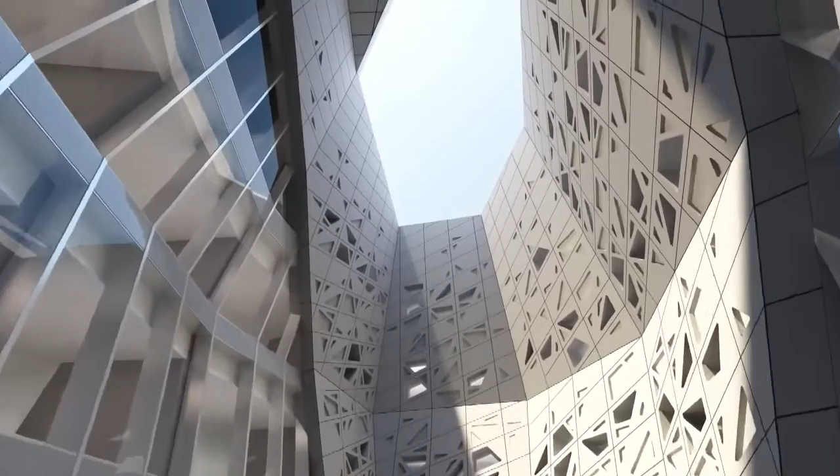Zaha Hadid Architects has never been afraid of taking calculated risks. When we design, we love working for clients who are incredibly ambitious because it pushes us beyond our ordinary boundaries. The office's aspiration of creating an architecture of movement and fluidity pervades the projects throughout. Anything is possible.

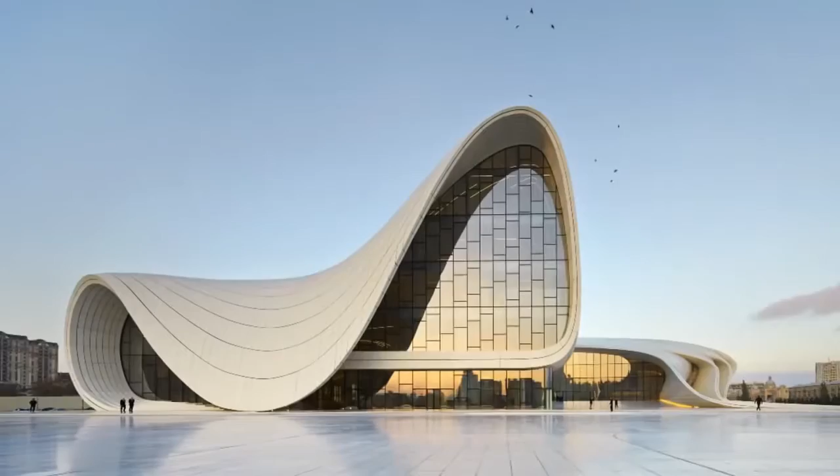The culture of Zaha Hadid Architects is a very open network of young professionals, very ambitious, very self-driven. Our office has many applicants from everywhere. They come from all over the world, and it makes a very nice atmosphere because people feel that everybody can bring something to the table.

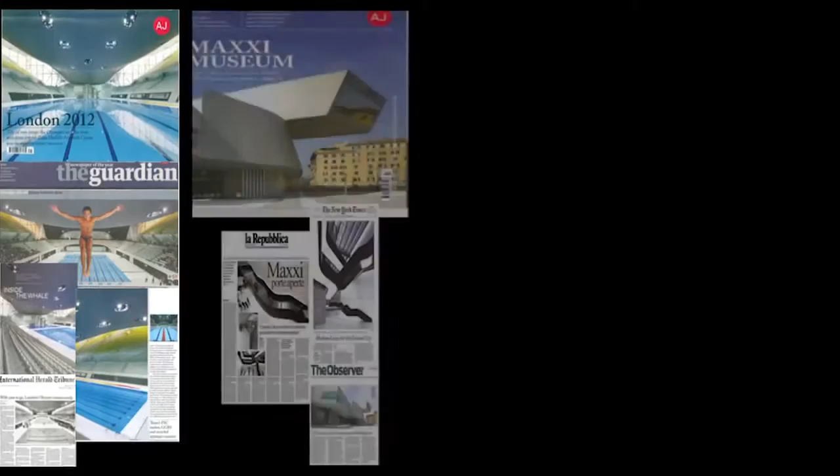We are a global design brand of 450 people operating across all continents. We had always known that the direction we are taking is the future of architecture, and that has been borne out now with respect to the great resonance and great success we've been able to achieve while we're still at the peak of our powers.

The design philosophy is geared to our time, to a new time of dynamism, complexity, to contemporary network society. We're operating on urban scale, architectural scale, but also we go into the interior scale, even all the way down to furniture and products. Our vision of the built environment is that it should have the same coherence and intricacy as nature.

We're an office that's obsessed with innovation. If we did it last year, we don't want to just be doing it again this year. A discipline like architecture is a theory-led discipline. As a teacher, you can only open the door a bit for someone to see what could happen beyond ideas.

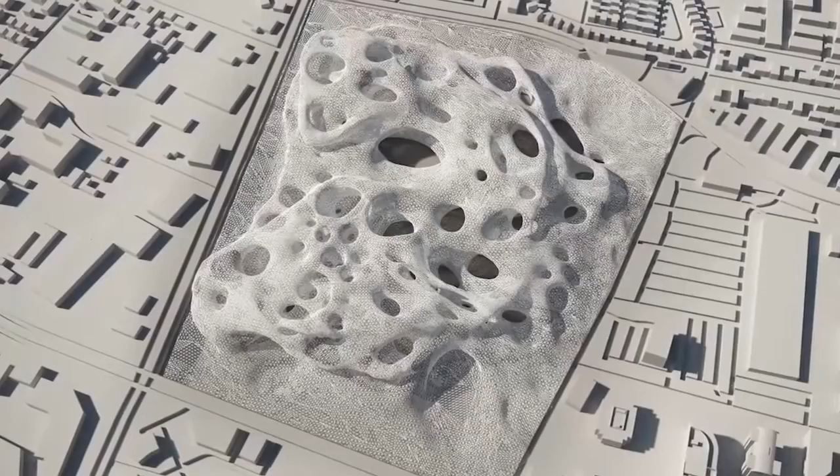We need to have the capacity to scan the scientific literature and then build algorithms and tools which we then distribute to the office. What is also interesting is how to do programmatic invention, because I think that is what is most exciting. We also have an in-house research group, CODE, the Computational Design Group.

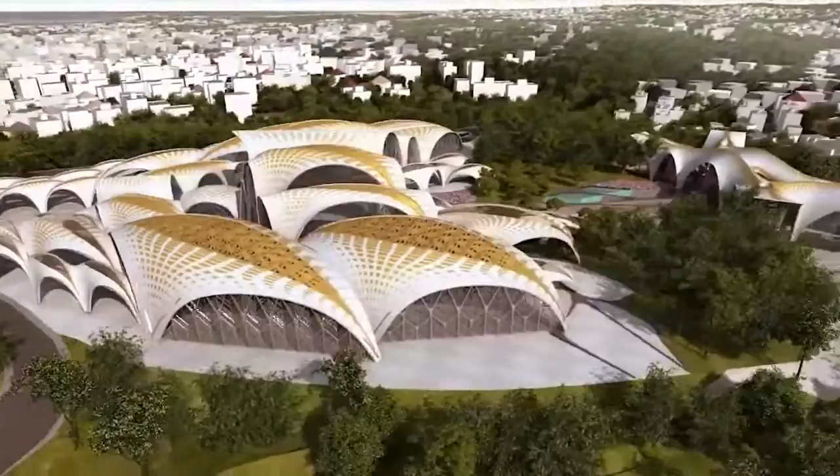The brief was to be able to not be a specialist group, but be a design research group. CODE is important in the range of things that it tries to do, between finding ways of generating shape and form and predicting its performance.

With computers, we were able to predict shapes without actually having to make physical models, cutting down a lot of trial and error time. The Venice Biennale is a very important architectural event where a lot of architects come together to discuss or exhibit their own work.

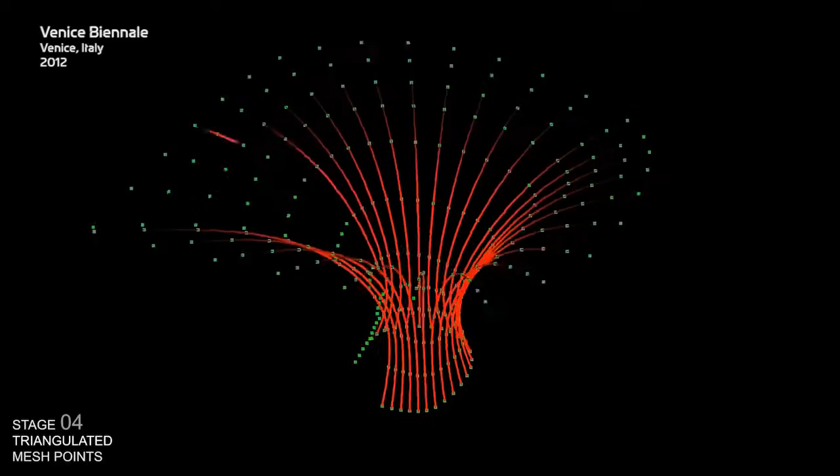So we were looking at paper as a way of finding or making things out of sheet material. Essentially, all designers are in a way hackers - they try and use their intuition to put things together.

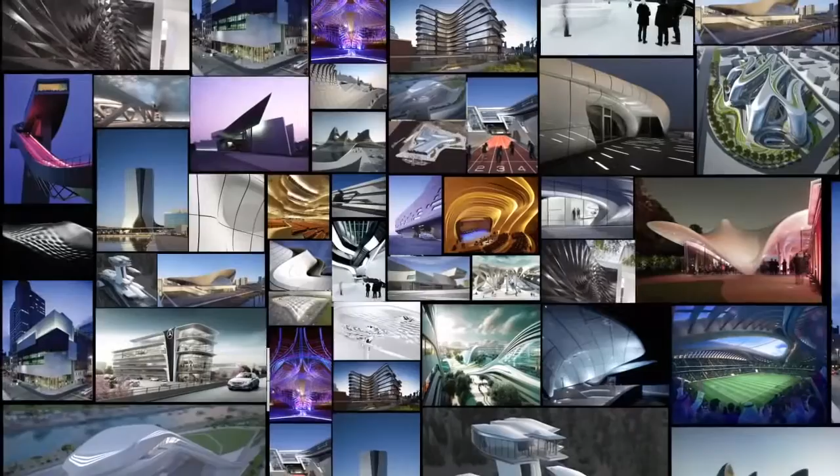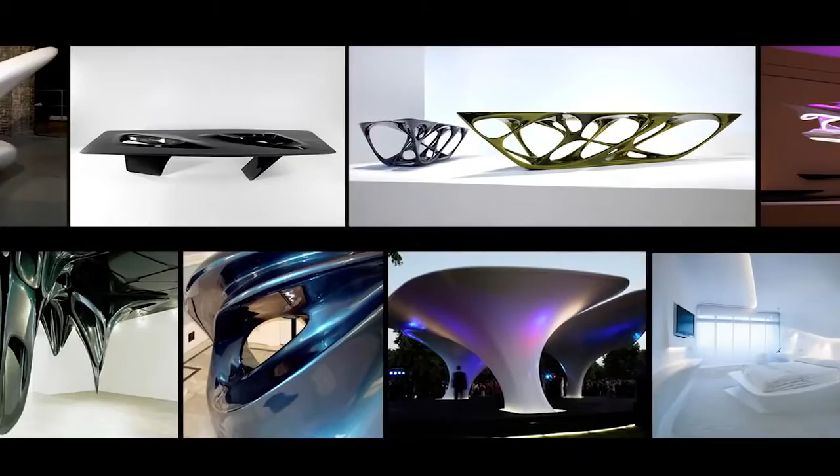The built environment we live and move through is a totality. The space, the artifacts, the products, even the fashion, the way we appear on the scene, is all part of a new world, a new way of life, and we want to have our finger in all of these aspects, which together create the phenomenal world we live and breathe.

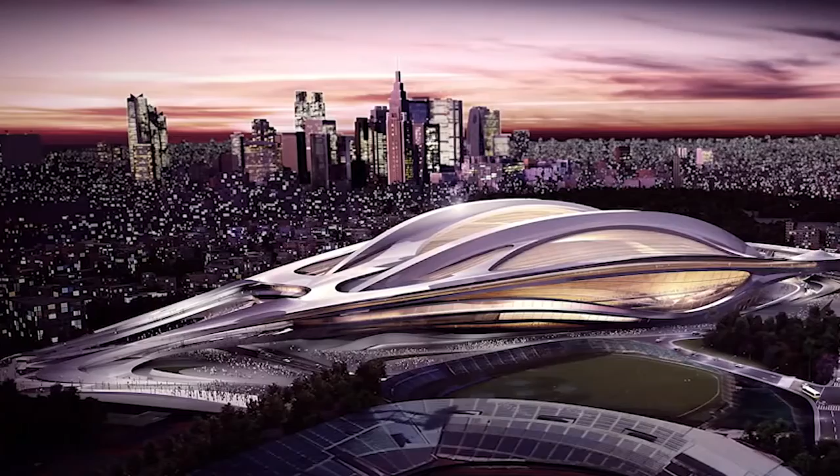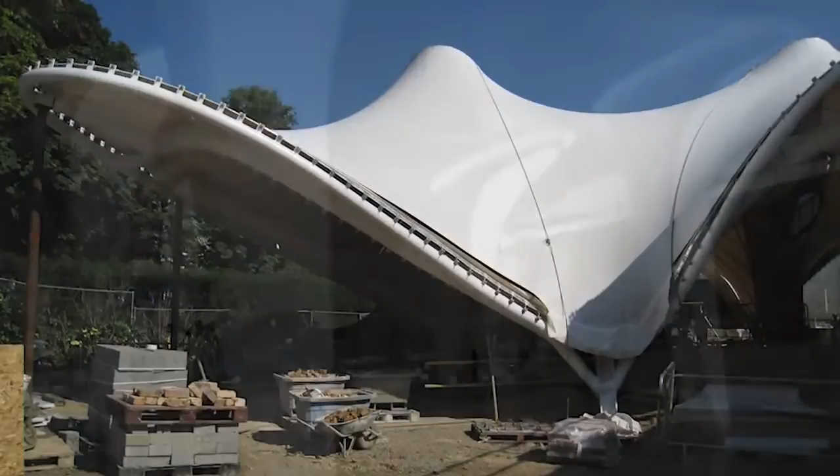Zaha Hadid Architects have invested a lot in cutting-edge technology, digital modeling, and file-to-factory fabrication processes. In every project that we do, we try and push the boundaries of what we can do, how quickly we can do it, and we see the technology as a means of achieving that.

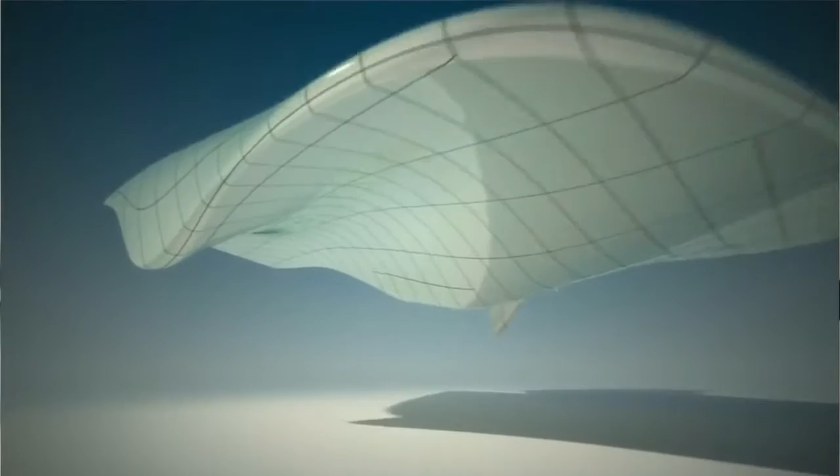We're entering a kind of material innovation, how you use materiality in a very different and innovative way - using innovative materials like glass, for instance, where glass has been thermoformed according to molds which have been delivered by the digital model.

Innsbruck Stations is an interesting example here. So here we have a thermoformed glass which generates a fluid body.

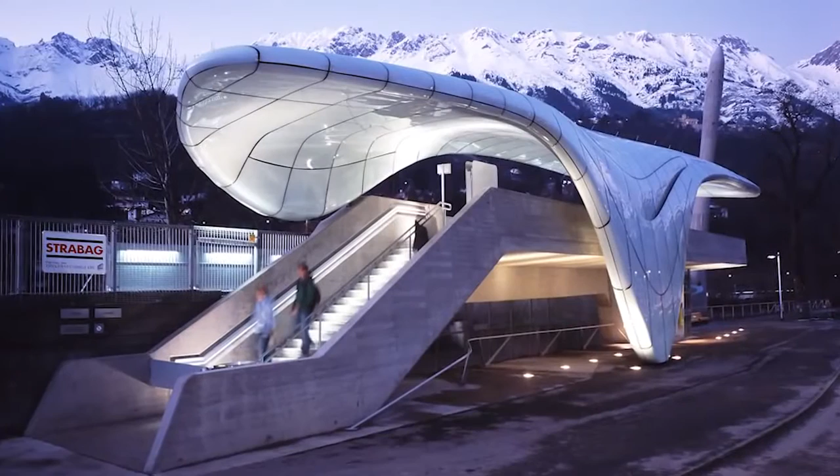Another interesting project to mention is our collaboration with Chanel for the Chanel Mobile Art Pavilion. The unusual thing here is that it's a lightweight modular structure which has been built and rebuilt in different locations, and can be quickly reassembled, demounted and reassembled again.

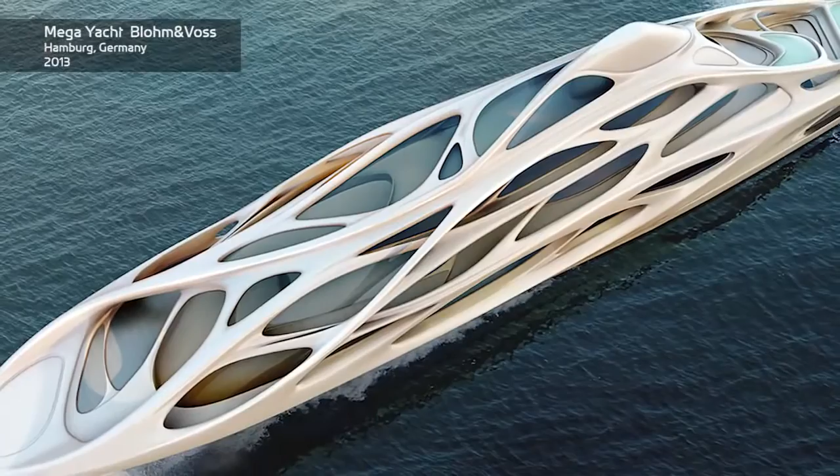One of the most fascinating projects we're currently engaged with is that mega yacht with Blohm & Voss. It's the height of elegance and lifestyle. So that kind of yacht is a fully designed universe, a compact microcosm.

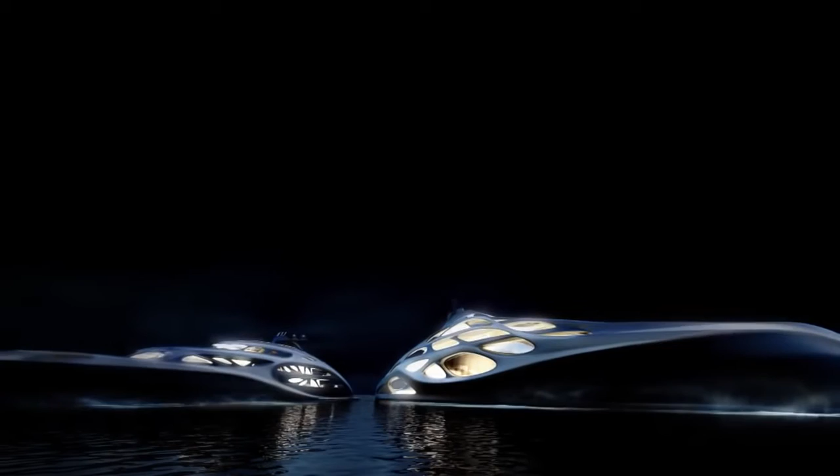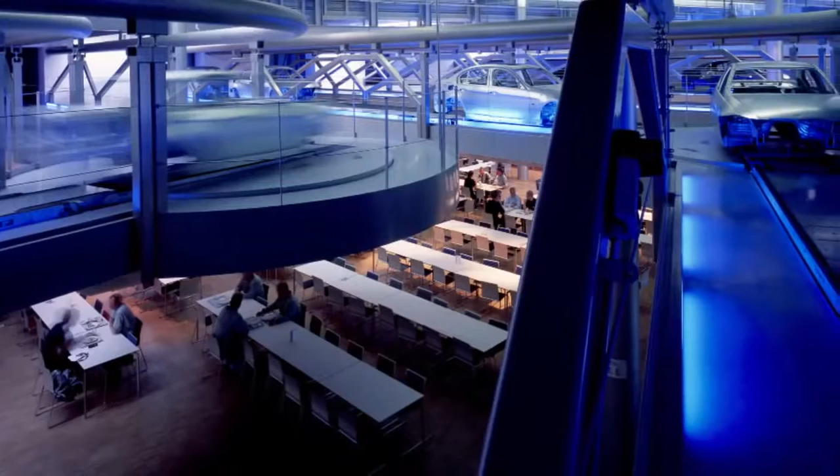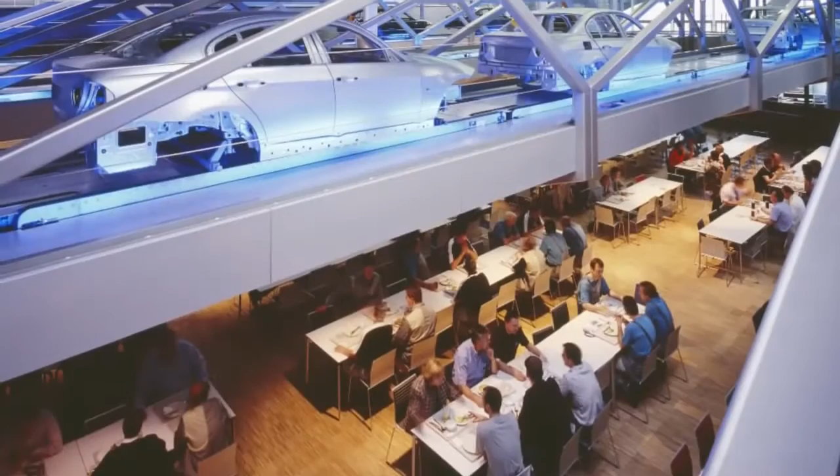The BMW project was really about not just organizing the plan, but combining blue-collar workers with white-collar workers and how they all stream through one space. The whole purpose of that for BMW is that you get better communication, more openness in terms of product development. We interpret their program, where they thought it would be an ideological kind of way of working, into a way of organizing the building.

Innovation Tower for the Hong Kong Polytechnic is our new extension of the campus there. So what's important to us here is that space of communication where you have these voids, 3 different voids cutting through the building. So I really have deep vistas layered in the depths of space, below, above, and all around, to scan what's going on and to make choices about the interactions and events one would like to participate in.

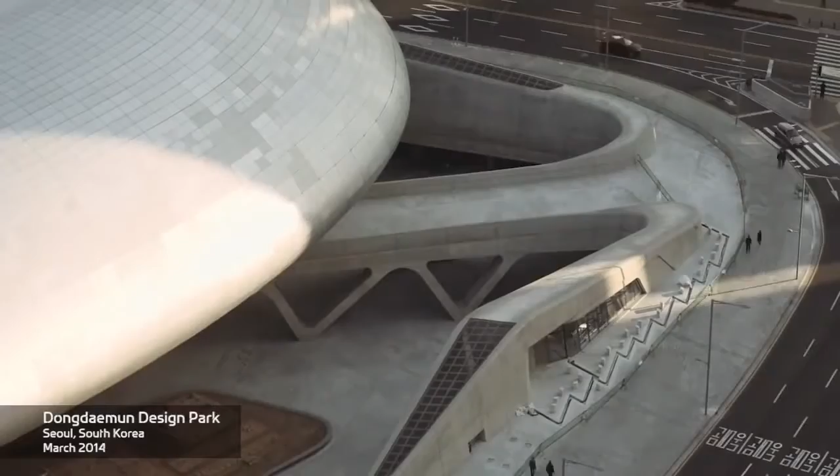We are here in the center of Seoul to open our new building, the Dongdaemun Design Park. This is one of the examples of this new style of parametricism. It allows an architecture to be organic, fluid, and adaptive to a complex configuration of the site, the topography, the richly differentiated program, yet bind it all seamlessly together through complex curvature to achieve calmness in the center of a highly networked space of communication.

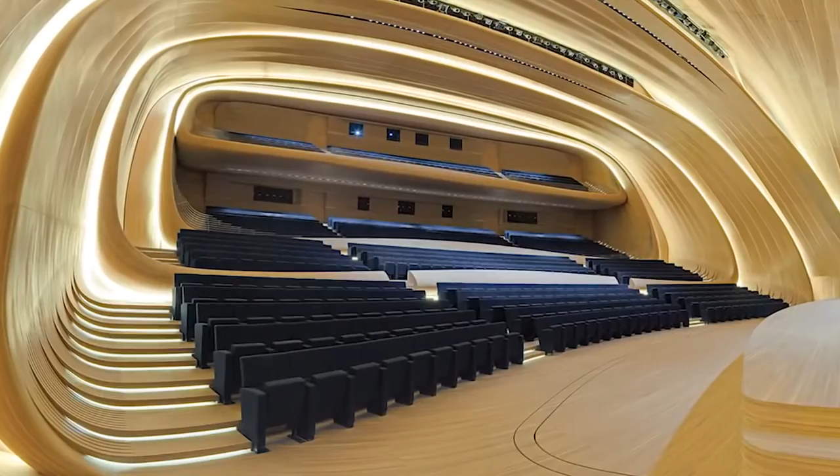Our new cultural center for Azerbaijan in Baku expresses our ability to bring together 3 components into one connective institution. It's a library, convention center, and a museum. They kind of merge into one. So the landscape literally crawls up the edge of the building. It's very exhilarating.

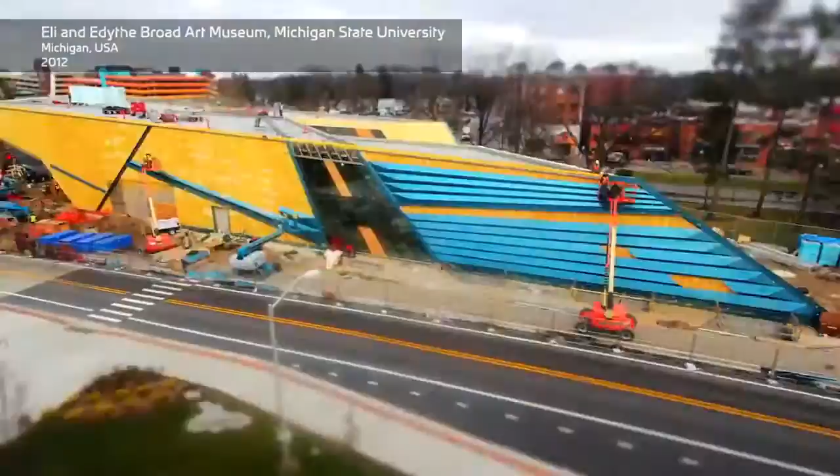What we have built up is a global network of collaborating engineers who have special machinery which we developed with them, or we found them, to integrate into our delivery process.

The Galaxy Soho required a paradigm shift on the client side because of the nature of its design. It was the first really curvaceous design they were attempting. They needed to buy into the idea that there would be a process that would allow us to implement that design. And that process, on one hand, was the adoption of the 3D platform as a foundation for documenting and resolving the geometry, but also using it as a vehicle for getting the project built downstream.

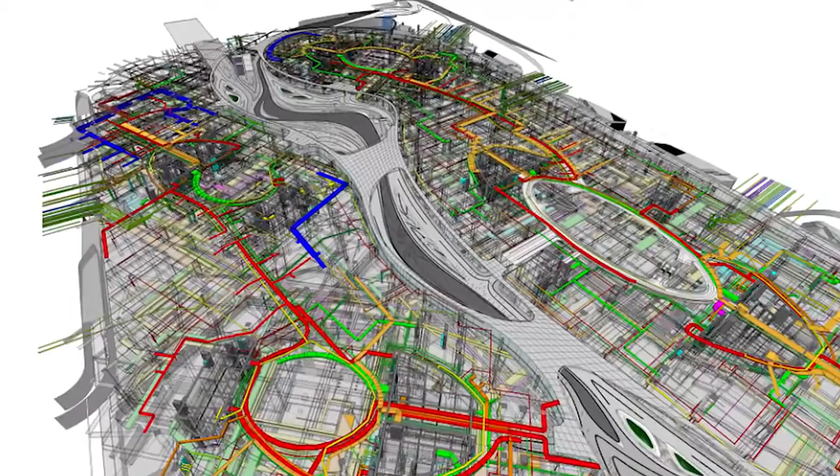All of these software tools are there to manage the complexity, to make it quantifiable, to make it predictable, so that we deliver projects where the client can visualize it, they can see it, they can have walkthroughs through it. In the end, Galaxy Soho is a very good example of how we can deliver projects around the world.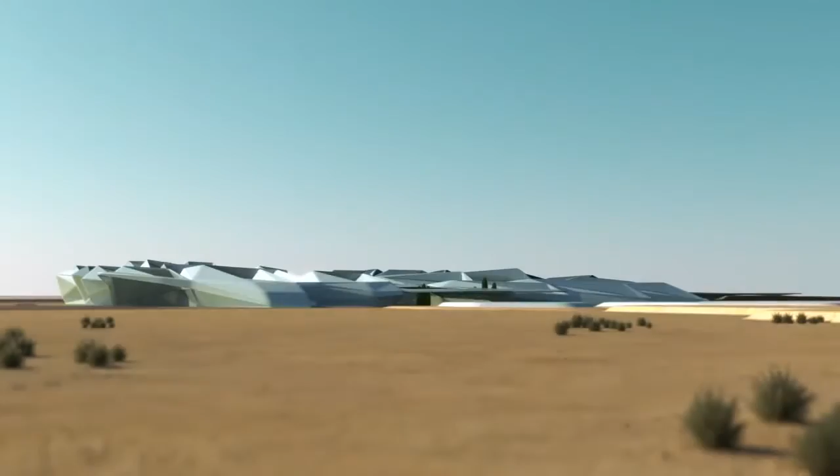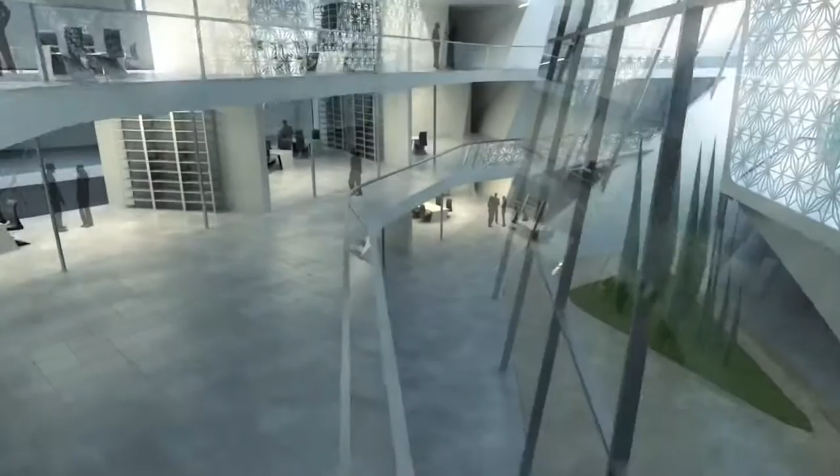KAPSARC is the home for a brand new think tank that's been made by the Saudi Arabian government. You have these atria and these courtyards that mark all of the different office areas within the building, and so that gives me a real sense of connectivity. I think these informal connections and chance meetings are where a lot of creativity and brilliance tends to happen in organizations.

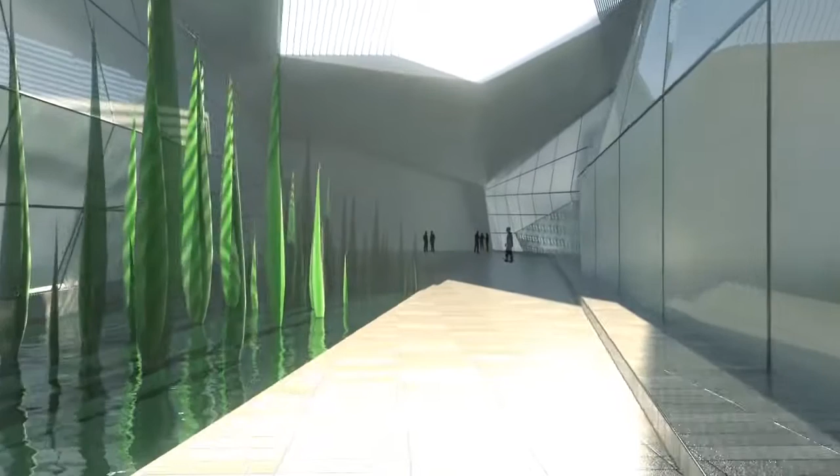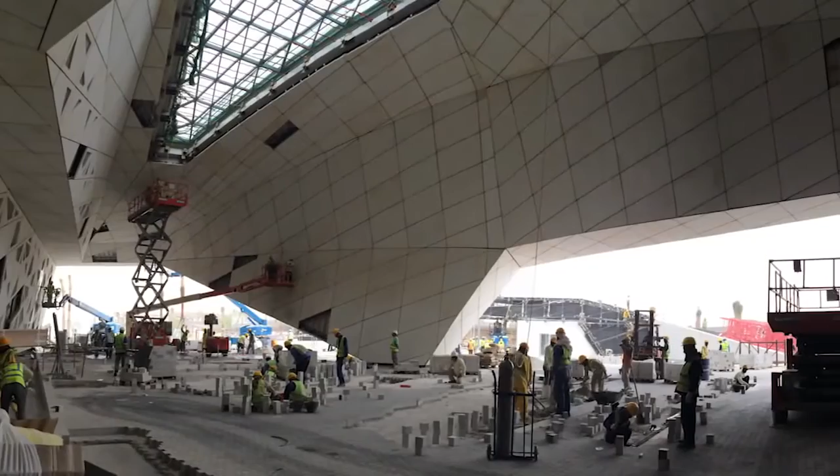If you're in the business of the future, you can't ignore sustainability. It's crucial when you make the architecture express the sustainability, not just through putting some solar panels on the roof, but actually you change the entire shape of the building. We managed to do a 42% reduction of the energy that's actually used to operate the building compared to what an ordinary box of a building would have done.

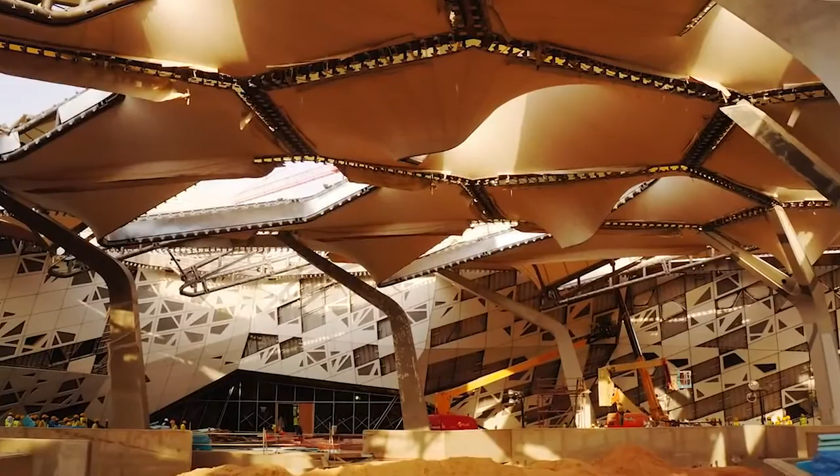We do focus on reducing the energy use, but it's very, very important for us that actually the human element is there. Working in Saudi Arabia on KAPSARC has been incredible, and I think one of the core values of our office is bringing incredible architecture to people in all different parts of the world.

We are at the top of our game, we're young, dynamic, we are skilled up, we're creating the endless forms, a huge, fertile and expansive repertoire of spatial organization and articulation which we could bring to bear. This realm of discovery is kind of almost endless.

If I could summarize working at Zaha Hadid Architects in one word, it would have to be dynamic. Dreams. Creation. We're unique. This company is a vision. Freedom. Energy. Extreme. Ambition.